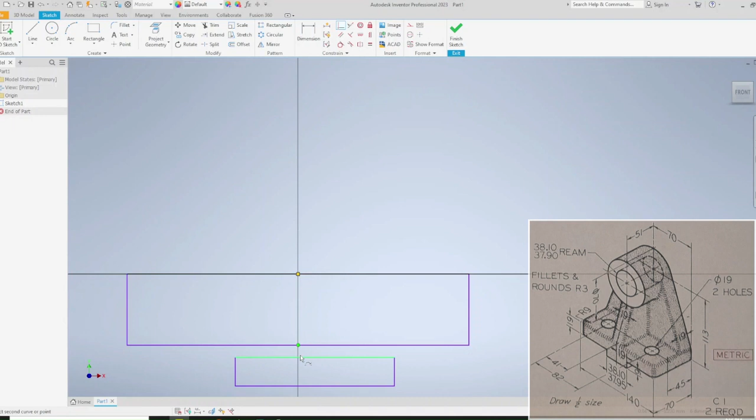The first thing that we want to do is to create a rectangle like this, and then another one directly below it. I'm going to go ahead and connect the center point of my line to the origin, and then the center point of this bottom line to the center point of the bottom rectangle. That makes sure that everything is in line.

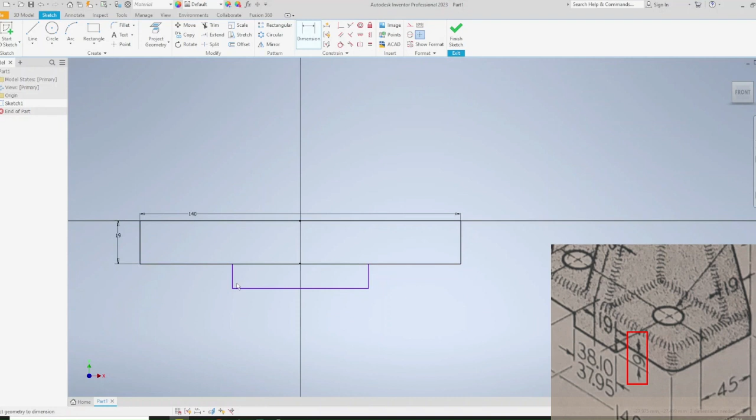Let's go ahead and dimension this to be 140 from left to right and 19 from top to bottom of the top rectangle and 9 for the bottom rectangle. This bottom rectangle has a dimension of 38.1, and let's go ahead and extrude. We're going to extrude this by 70 millimeters.

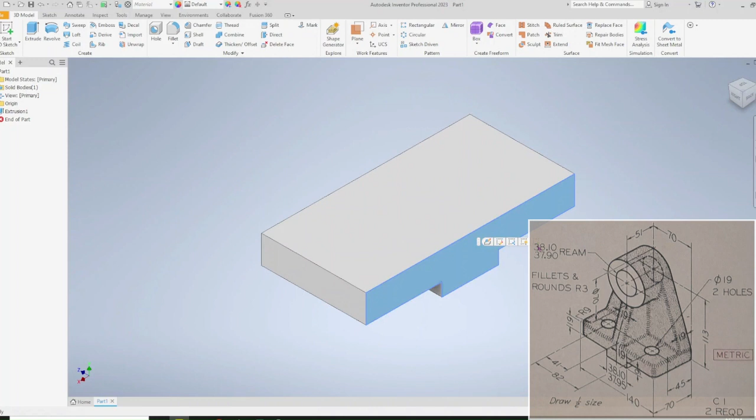Now we can go ahead and create the back piece. So I'm going to turn this around and create a sketch on the back. I'm going to project my geometry. I'm going to go ahead and draw a circle that has a diameter of 70. Go to my vertical constraint and click on the center point of my circle and the midpoint of my bottom rectangle to make sure that they are exactly in line with each other.

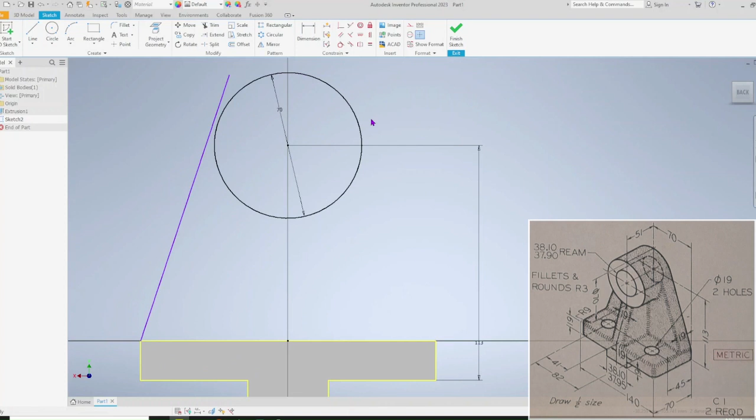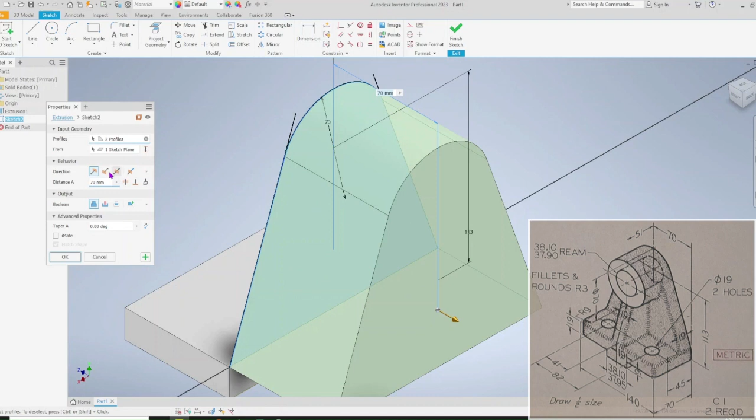I'm then going to dimension from my circle to this bottom line here, and that will be 113. I'm going to add 2 lines just randomly, not connected to the circle, but I am going to connect them to these corners, and then I'm going to use my tangent button to connect this to this and my circle to this line. Once you have that, go ahead and extrude. Select both the circle and the section made by those 2 lines, and we are going to flip this and extrude by 19, and we have this right here.

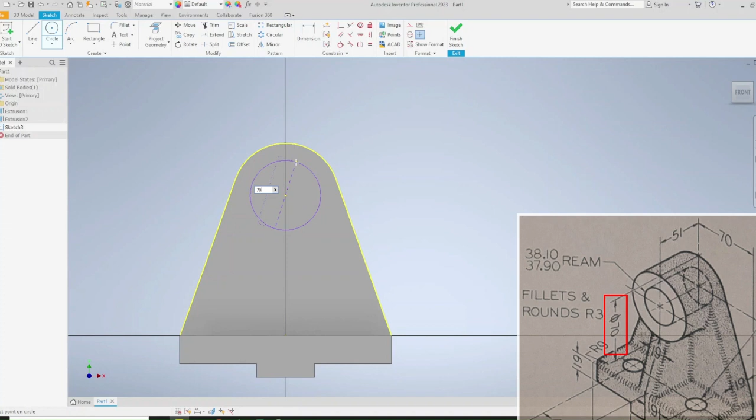The next sketch will go right here on this face, and I'm going to use my project geometry, use my circle, and create a circle that has a 70 millimeter diameter, and extrude this by 51. But since we already extruded it by 19, we do have to subtract 19. Now we have a general shape.

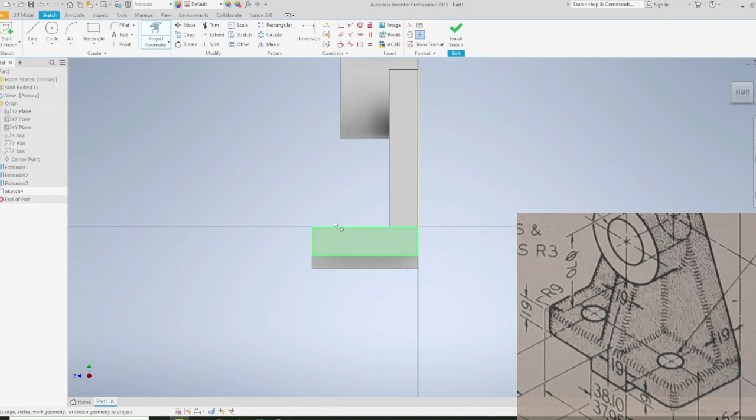I'm going to create a new sketch, expand my origin, and select the YZ plane. I'm going to project my geometry of that circle that is sticking out, as well as this bottom rectangle and this back rectangle. I'm going to create a triangular shape. I'm not connecting to anything just yet, and I'm going to close it off so that way I'm sure that this part completely fits.

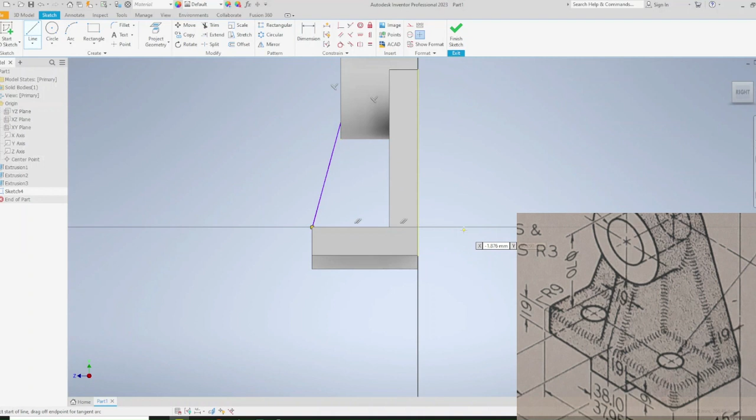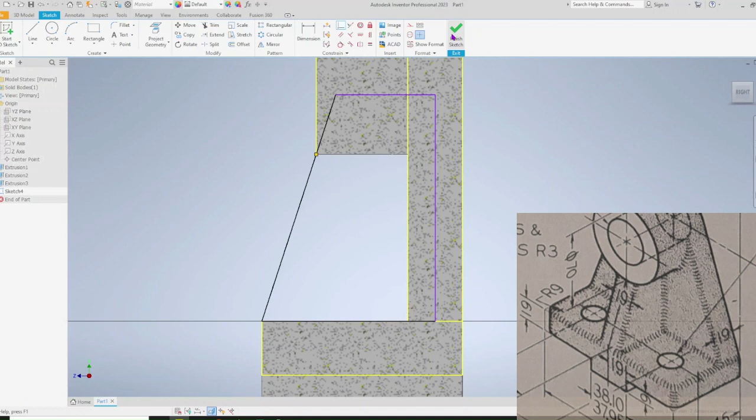I'm going to right click and go to slice graphics so that way I can see the inside. And now I'm going to make sure that this line connects to this endpoint right here, and that is it. I'm going to leave this hanging out and not touching any of these other lines because I want to make sure that I have more than enough space when I extrude this. So finish your sketch, extrude, and we're going to split it in both directions symmetrically 19.

We have 3 holes to add, so the first 2 holes that I'm going to add will be on this face right here. 1 and 2. I'm going to line them up horizontally, so that way when I move one, the other one will move. I'm going to click the equals constraint, so that way they are equal with each other.

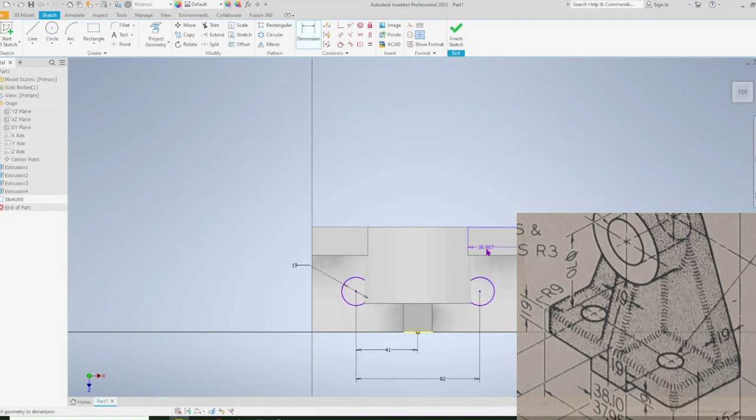The diameter of this circle is 19, and they are located 41 from the center and 82 center to center. They are also located 45 from the back. Once you have that, go ahead and extrude, and we are cutting all the way through.

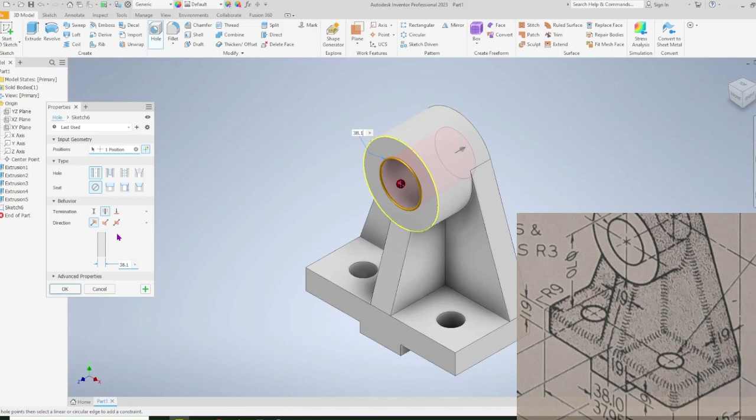And we have this last hole to add here, so I'm going to use my hole function. Click on this face, click on the circle, that's my concentric surface, and type in 38.1. Go ahead and save this.

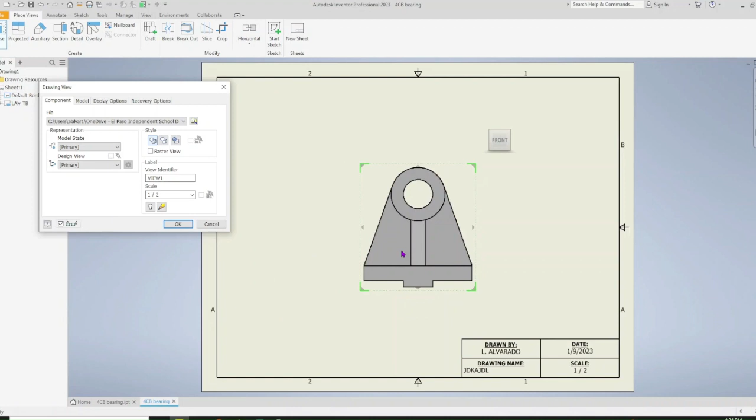When you open up your title block, remember that it is default in inches, so go to Tools, Document Settings, and change this to Default Standard ANSI mm, apply and close. Now go and place your base view, our front, our right, and our top view.

I did notice that we forgot to add fillets, so let's go back to our drawing and add those fillets. The first fillet that we're going to add is going to happen on these corners right here. These have a radius of 9. Everywhere else has a radius of 3. So change your radius and start selecting all of your edges.

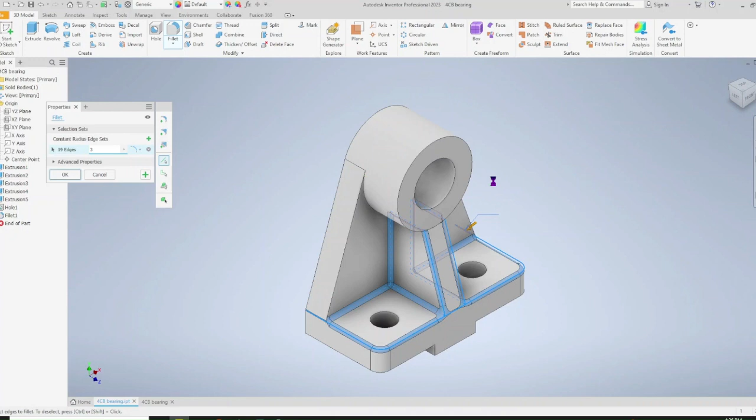Go ahead and save, and then go back to this, and now we can see that our fillets are now easily seen. It is now your responsibility to add dimensions, add a note that says metric, and change the drawing name.